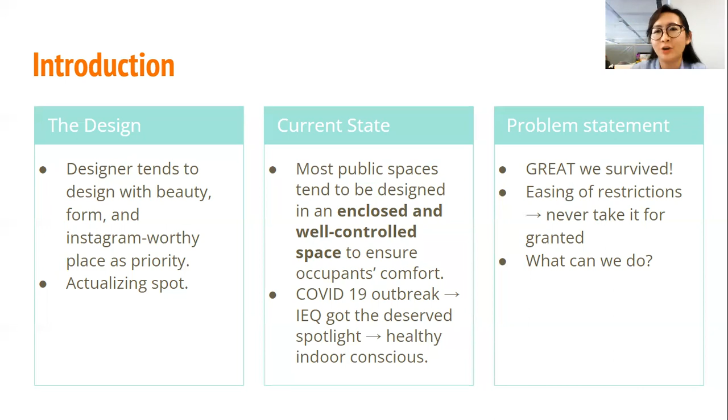So it's good that we have survived, but the problem is that as survivors, we should not take this situation for granted. Because of the ease of restrictions that will happen in the near future, we as designers need a good framework and understanding on how to adapt to the situation and deliver healthier and better interiors for our community. So what can we do?

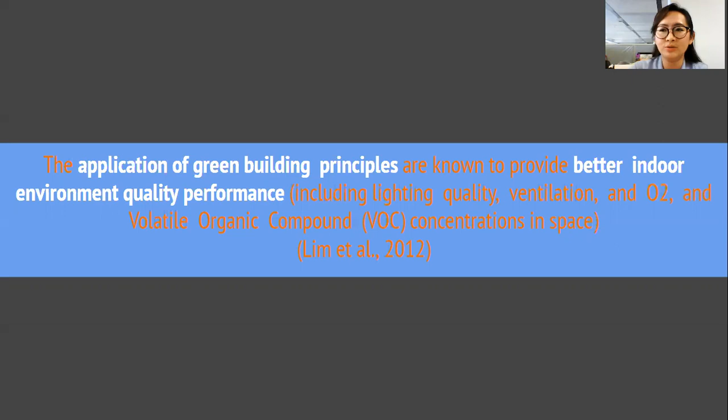Maybe we can look at the green building assessment system available in our countries. I believe almost every country has its own green building assessment tools that provide a good chance for better indoor environment quality performance. As this study is in Indonesia, I will make use of Greenship as the green building assessment tool covered in this paper.

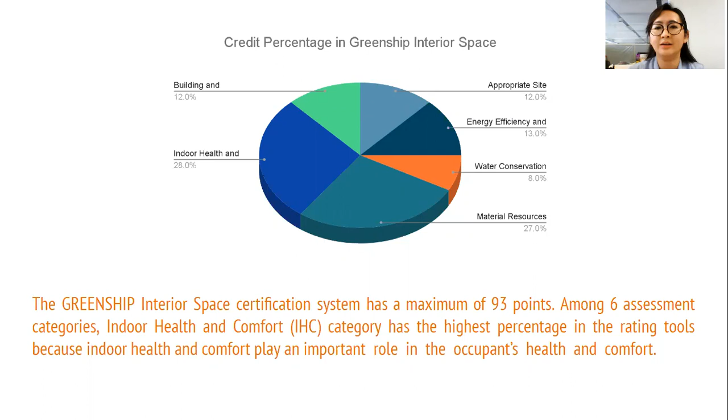The Greenship interior space certification consists of 93 points total across 6 categories. Among those categories, one is the Indoor Health and Comfort, or IHC category, which has the highest percentage in the rating tools, because indoor health and comfort plays an important role in occupants' overall health and comfort, which is being sought by our customers nowadays.

So what we are going to discuss today is the current state of design adaptation, which is still open for review and suggestions from professionals—in this case, interior designers and health-conscious parties. The problem is that a Greenship interior space certification exists, but whether it is actually applied is the question.

As we all know, each certification system and assessment has checklists and points to let us know, as designers, assessors, or end users, what's supposed to be there and what is considered important. That will be a tool to help us develop our design. But whether it is applied or not is another question to ask.

For this research, I will examine the green building standard and interior adaptation for the new normal, especially for shop houses, which may not necessarily be able to introduce the cross ventilation needed at the moment. It's important for our team to see whether our students in the interior design and styling for commercial spaces studio understand and implement this in their design, as well as the tutors as their professional supervisors.

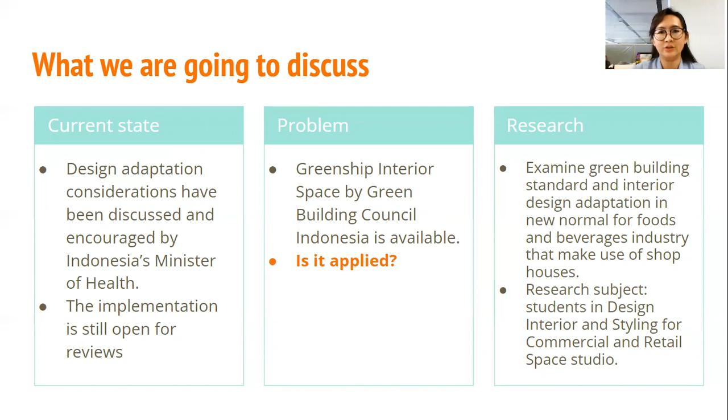The research methodology I will use is basically a qualitative approach using a systematic literature review and comparative study. The SLR will be used to define the research problem and gather corresponding resources in the literature, and the comparative study is conducted to gain insight on the on-site application of the research question. To understand this, I will break down the design process used by the students into 5 steps of design thinking.

In this paper, I will discuss the results obtained at each stage of design thinking. By understanding this, we will see that the literature review I use for this paper consists of 3 major areas.

The first is the mitigation rules applied by the students, as it is a decree related to the health minister. Then the indoor environment quality adaptation, and the Greenship indoor space requirement and analysis itself.

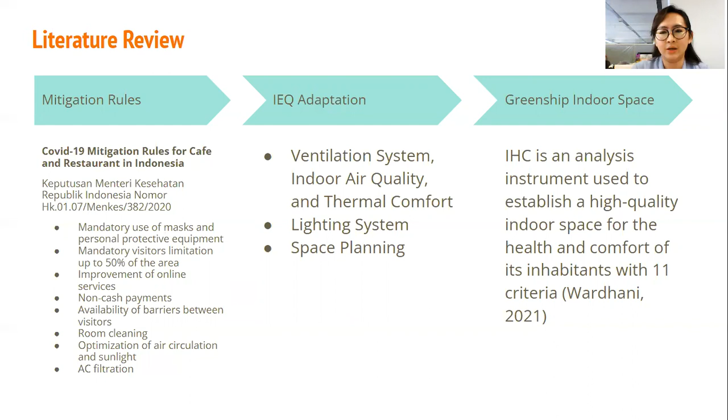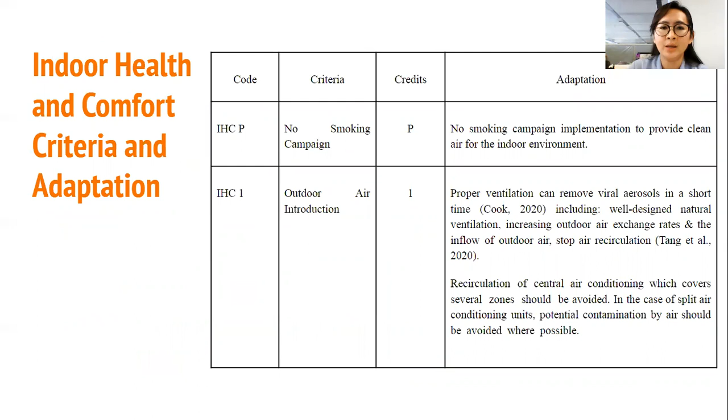For the indoor health and comfort criteria and adaptation, I will make use of the paper developed by Kusuma Wardhani in a previous paper, which consists of 11 criteria with 1 prerequisite.

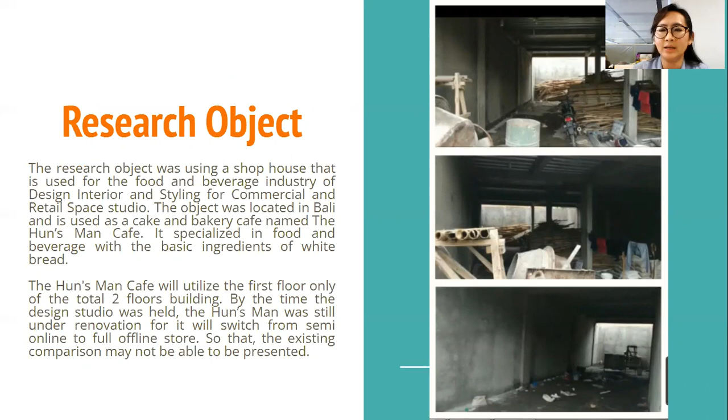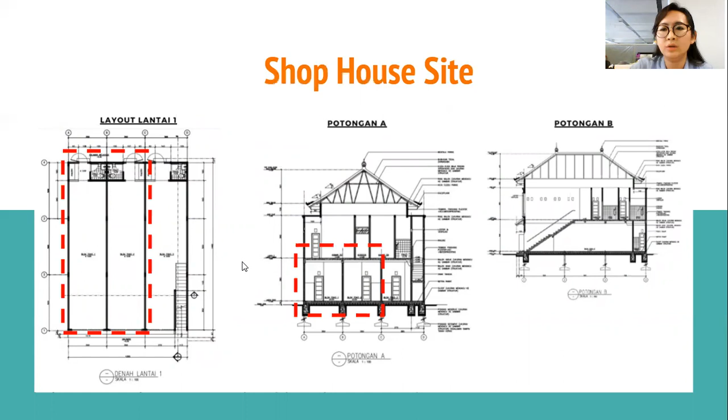For this research effort conducted in the studio, the Hun's Man Cafe is still under renovation, so there's no comparison with the existing situation with the design proposed by the students. This is the shop house site. The Hun's Man Cafe will make use of 2 units of shop houses, as you can see here, 1 and 2, and they will only make use of the first floor.

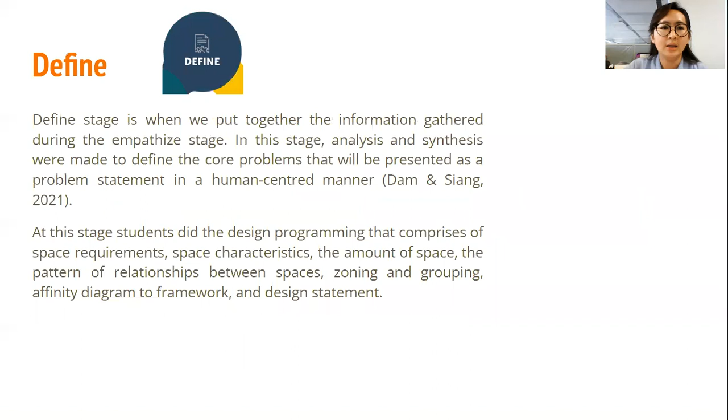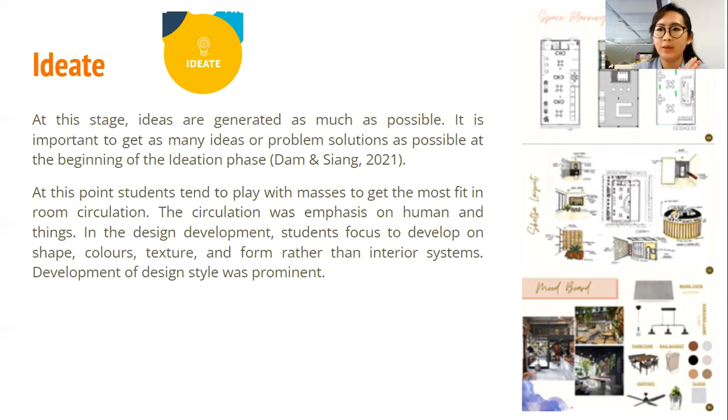For the empathize stage, the students do the literature review, typology studies, and field site data collection, to be analyzed and synthesized in the define stage. Then they go for the ideation stage to develop their design ideas, making sure what they have in the other 2 stages is incorporated as well.

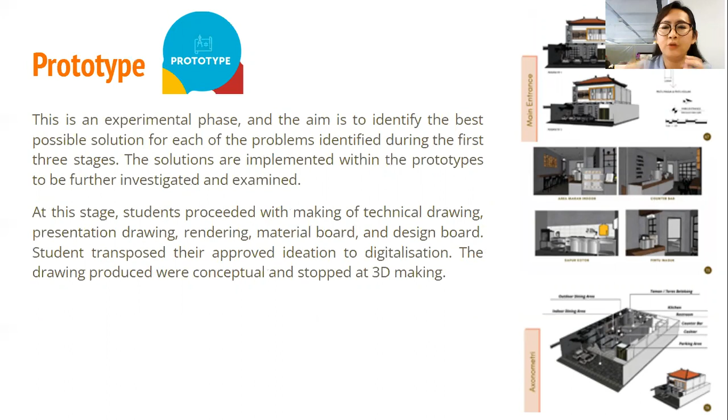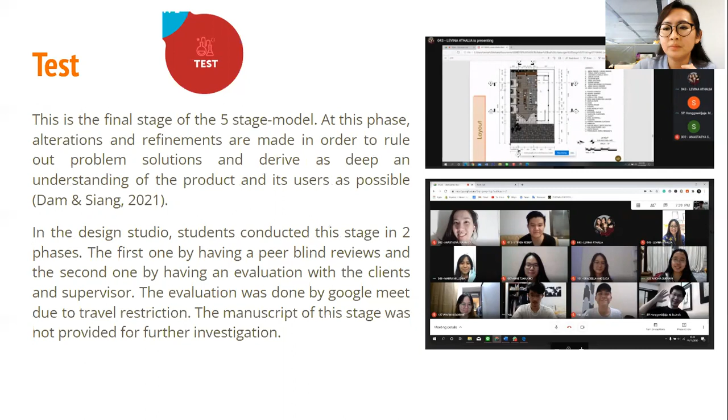For the prototype, they do the experimental phase to aim for the best solution for the Huntsman Cafe. This prototype is delivered in the test stage to be presented with the tutor, professional tutor, and the owner of the Huntsman Cafe. After scrutinizing their test, the prototype and test become the final product for their design. This is the summary of their application of the indoor health and comfort criteria.

As we can see here, the first prerequisite, the no smoking campaign, is not available, sadly. By this not being available, we should not proceed to the other 11 criteria, but for the sake of this research, I will go through the other 11 criteria to see what is and is not there in their design.

As we see here, we have outdoor air introduction available by providing an outdoor dining area with a simple plant selection in their design, and the operable window is present, but with a very minimum amount in it.

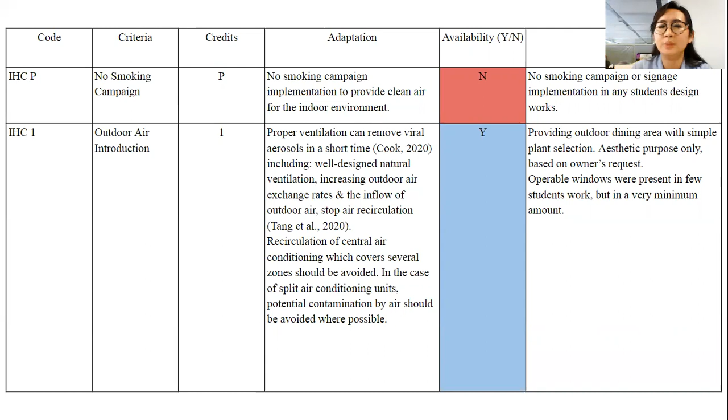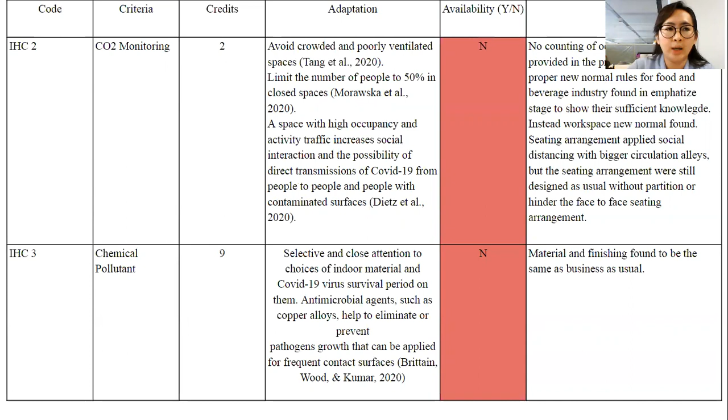The second one is the CO2 monitoring and chemical pollutant, the IHC 5, the biological pollutants also not available, and visual comfort, outside view and daylight, is available greatly in their design.

Students tend to provide artificial lamps, giving a very good effort to design their visual look, not only to develop the forms, but also to develop the branding and the lighting to promote good visual comfort. The outside view and daylight is also provided by the openings and access to the view, harnessing natural daylight with consideration to the building orientation.

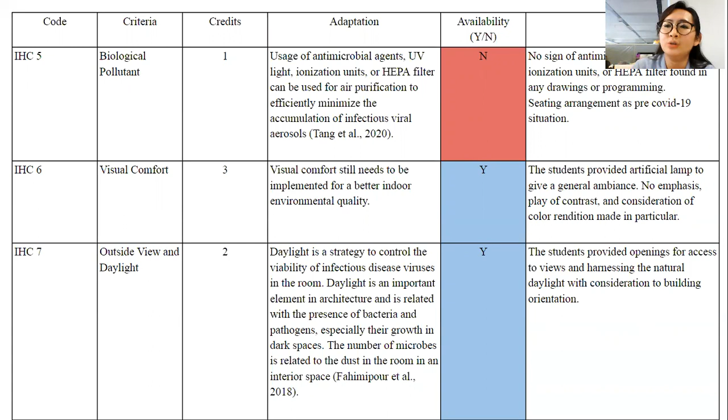IHC 8 and 9 are also not available in their design. These are the thermal comfort criteria. They may not have had enough study to actually justify whether their thermal comfort is adequate, so this will be considered as not available.

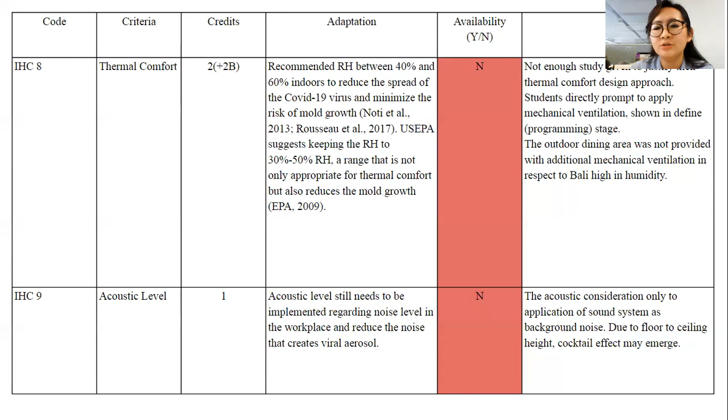And for the acoustic level, they only considered the application of a sound system as background noise, but there's no quantitative assessment to justify whether the acoustic level is proficient.

The IHC 10, the interior plants, is available. Most of the students apply artificial plants indoors for relaxing purposes, considering the owner's request, but there's no selection with enough consideration as to why they chose certain plants to be featured in their interior.

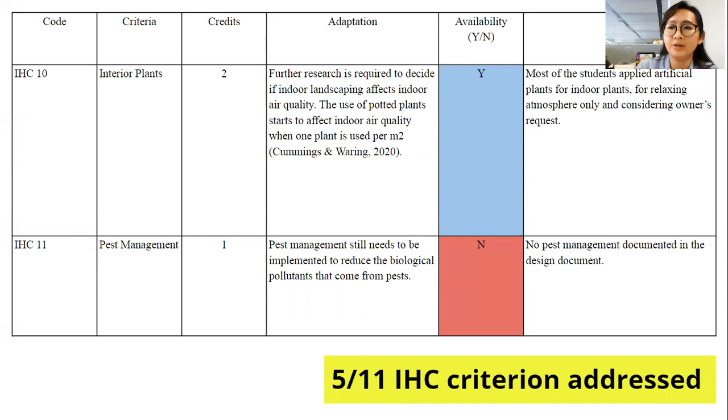For criteria 11, pest management is not available, so no pest management is documented in the design. Overall, students only apply 5 out of 11 indoor health and comfort criteria addressed in the Greenship standard.

The next is the indoor plants, and then the last 2 are outdoor air introduction and visual comfort. These two, indoor pollutant source control and outside view and daylight, were possible only due to the site position and architectural design that enabled the openings to be designed on the site.

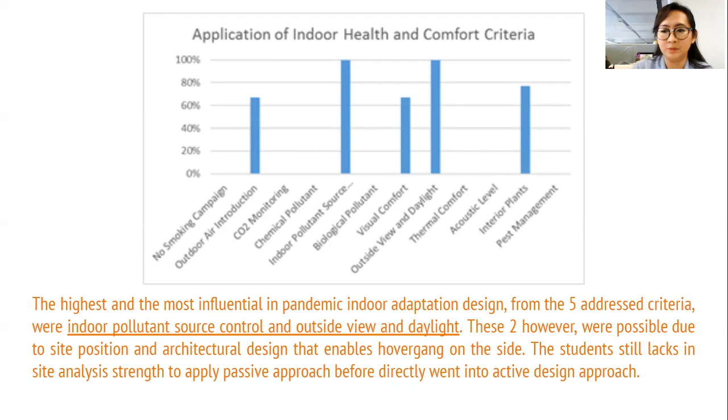So the conclusion is, yes, COVID-19 may have a bright side, as it acts as a wake-up call for all of us to understand and be aware that a healthy indoor environment is not a luxury, but a considerably normal approach to ensure building occupants can work optimally.

I believe each country will have a checklist provided by their Greenship green assessment tools, providing a listing of indoor health and comfort aspects, so it can serve as a checklist for designers to start their healthier indoor interior design.

However, the design approach to indoor health and comfort may not be well known by the designer, student designer, and tutor. So there's still a lot of room to improve, and a lot of room for Greenship to further promote itself as a checklist to help designers.